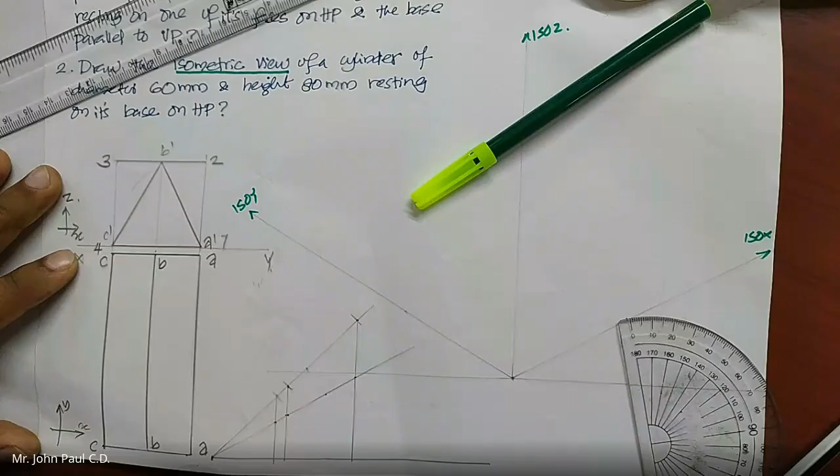ചെയ്യാമോ കുറച്ച്? കേട്ടില്ല. വീഡിയോ കുറച്ച് സൂം ഔട്ട് ചെയ്യോ? വൈ?

എന്തിനാ? ക്ലിയർ ആയിട്ട് വിസിബിൾ അല്ലേ എനിക്ക് നേരത്തെ, അതുകൊണ്ട്. സൂം ഇൻ ചെയ്യാനാണോ ഉദ്ദേശിച്ചത് അതോ സൂം ഔട്ട് ചെയ്യാൻ? സൂം ഔട്ട്. സൂം ഔട്ട് ചെയ്ത് കഴിഞ്ഞാൽ ഇത്രയോ? ഇങ്ങനെയോ?

Okay, is that clear now? I don't know.

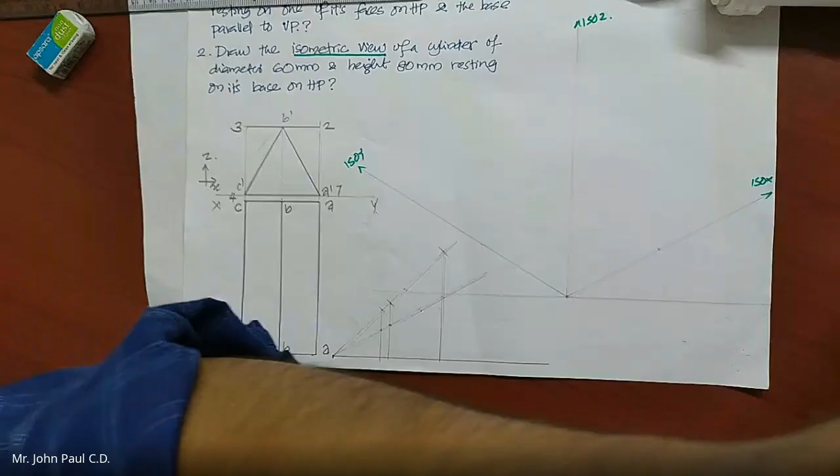Nikhil, isn't it visible? It is showing complete on the screen for me. Can you rotate your mobile if you are using it? Keep it in portrait mode. Sorry, landscape mode, so you can see that. Otherwise it will be very small, I think. You may not be able to identify the points. That's why I'm keeping it here.

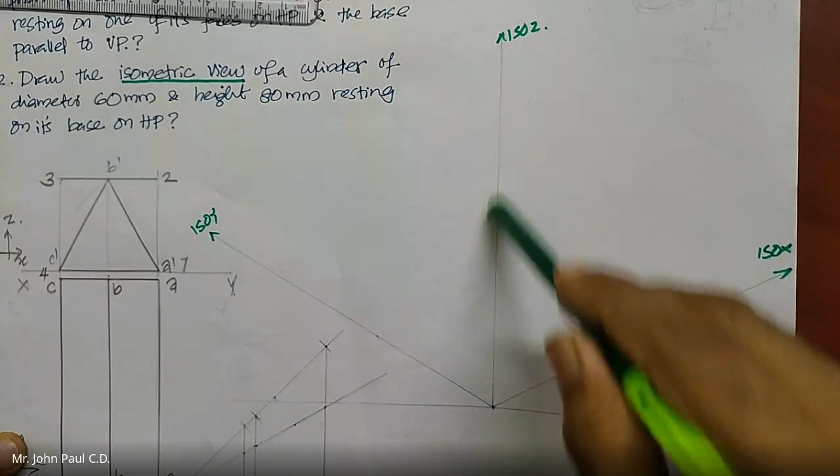Anyway, so the difference of this problem is you have the characteristic view only in this particular XZ plane. So you will have to draw that rectangle and the triangle inside in the iso X, iso Z plane. So here I have to draw the rectangle. That's the only difference. Okay, so I'll do that. I hope it is clear.

അതായത് നമ്മൾ നേരത്തെ വരച്ച പടങ്ങളിലൊക്കെ the characteristic view was below, it was in the XY plane. So I used iso X and iso Y plane to draw that rectangle or whatever pentagon or whatever shape we have in the characteristic view.

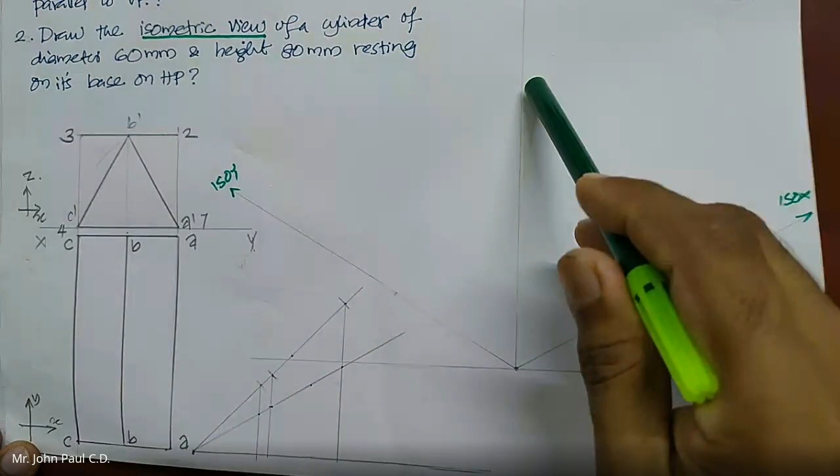But here it is in the XZ plane, since it is resting on one of its rectangular faces on HP. So it comes like this. So you see XZ plane. So you have to draw that rectangle in iso X, iso Z direction with the isometric dimension, because the question is given as isometric projection. So I'll do that.

So this was the length along the x-axis. Along x-axis, this was the dimension, which is 40 actually. So I took, I marked 40 here and I got iso 40 here. So I just marked it here so that I got this point as 1 and this point is 4. See, I'm looking from here. 4, 1, 2, 3. Okay, so 4, 1 I got here.

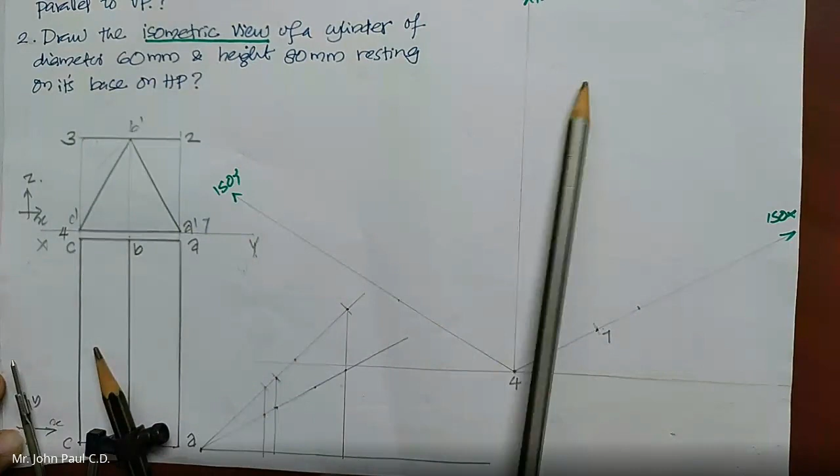To get 3, I have to get the iso dimension of this one. So I just marked it here. So I'll take it from this using a compass. So I mark it here along iso Z direction. So I got that point also.

Okay, now I'll complete this rhombus or parallelogram. Either you can do the same with the compass. അതായത് നമ്മൾ ഈ എടുത്തിരിക്കുന്ന ഇതേ ഡയമെൻഷൻ ആണ് ഇവിടെ നിന്ന് വരേണ്ടത്. So you can use the arc method. ഇങ്ങനെ വരച്ച് ഈ ഡയമെൻഷൻ അതായിരിക്കും കുറച്ചുകൂടി ആക്യുറേറ്റ് തോന്നുന്നു.

This you can mark here so that you will get the corresponding point over here. അതായത് ഈ ഡിസ്റ്റൻസും ഈ ഡിസ്റ്റൻസും സെയിം ആണ്. I don't know whether you can see. Now you can see, right? So 1 to 2 and 4 to 3, the height will be same. And 4 to 1 and 3 to 2 will be the same. So you can take those dimensions in a compass and cut an arc, you will get the corresponding point.

So I got 2 here, and this is the 3, which I had already marked. Now I'll join them to get the rectangle here.

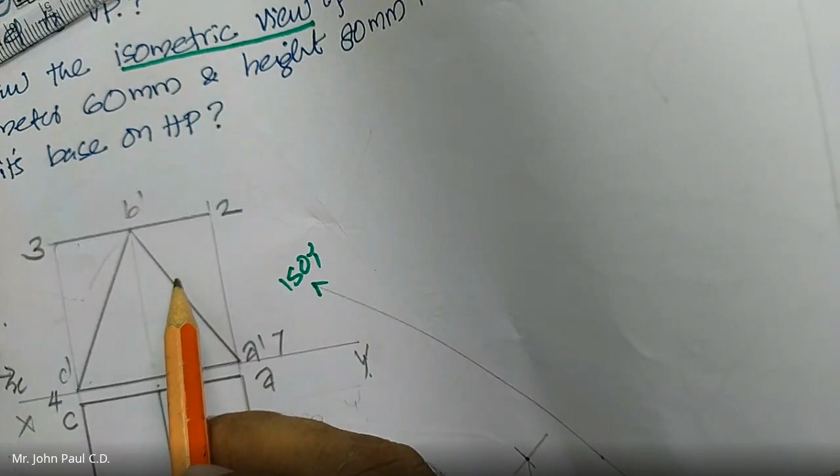Okay, so here what I can do is, this point is already A. This is already A. From this figure, I can say that it is A. And this is C. This is C. And you see that B is actually the midpoint of 2, 3, so here also it should be the midpoint.

Okay, either you can do it like that, ഇതിന്റെ midpoint കണ്ടുപിടിക്കാം, measure ചെയ്തിട്ട് അതിന്റെ midpoint mark ചെയ്യാം, or what you can do is, with respect to this rectangle, what will be the dimension I should move towards the right along the x direction? ആ dimension എടുക്കുക, അത് ഇവിടെ മാർക്ക് ചെയ്യുക, അതിന്റെ iso dimension കണ്ടുപിടിക്കുക, then I can mark it.

I have to measure this distance, because this much distance has changed. This much is changed exactly, and this much is the y ordinate, x ordinate, y ordinate. So you need to find out what is the x ordinate here.

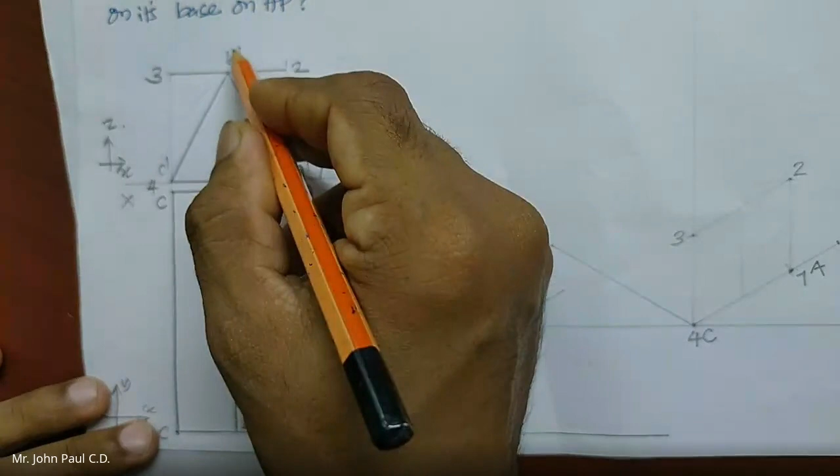You can measure it, or using a compass you can take that dimension, mark it here, get the iso dimension and mark it along here, and project along z direction, so that it will touch the 2, 3 point. So actually that will be the midpoint.

That means, measure how much you need to go from here, find its iso dimension, mark it here because it is isometric projection. Mark the iso dimension, then move along z direction, along iso z direction, so that you will reach up to the 2, 3 line. That point is capital D, so the midpoint you will get as capital D.

Now I got that face near me, which I can join. This will be the figure I am going to get, the triangle. Now I got one ABC, that means one base I have got.

I have another ABC on this side, so I have to mark it, isn't it? For that I will draw some thin lines from B as well as A, along iso y direction. In your case, maybe there will be a line already there, or you can draw a thin line in the graph. Now I need to find what is the dimension along y direction.

Can you tell me what will be the dimension along y direction, from one ABC to another ABC? Iso 70. I have given 70 or 80, 80 is what is given. 80. Iso 80, iso 80.

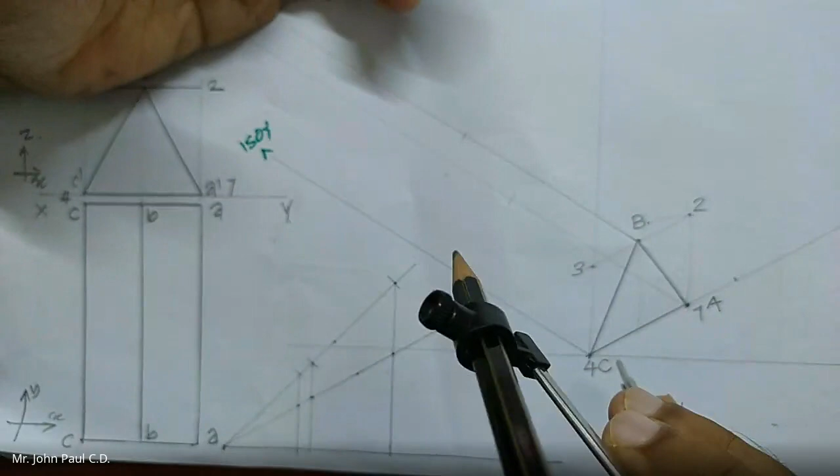So I'll get iso 80 from here, which I have already marked here. This is iso 80, and I'll mark it from A to A, B to B, and C to C, so that I'll get new points, which I have again named as A, B, C. So CC is iso 80, AA is iso 80, BB is iso 80. Now I can join the boundary, which will always be thick. So this is the boundary.

Now one more point is left. It's the same rule applicable as orthographic projection. A is within the boundary, which is supposed to be invisible, because I am looking from here. I am looking in these two directions. So this will usually be far away from where I am looking.

So this must be invisible, I assume it like that. All the lines towards A should be invisible. So it goes like this: invisible, and this line also should be invisible according to the law.

Anyway, my assumption was correct because I have to cross a visible edge, so that edge should be invisible. So if this is invisible and it is reaching up to an inner point, which is inside the boundary, all the edges towards that point will be invisible. So this is the final answer.

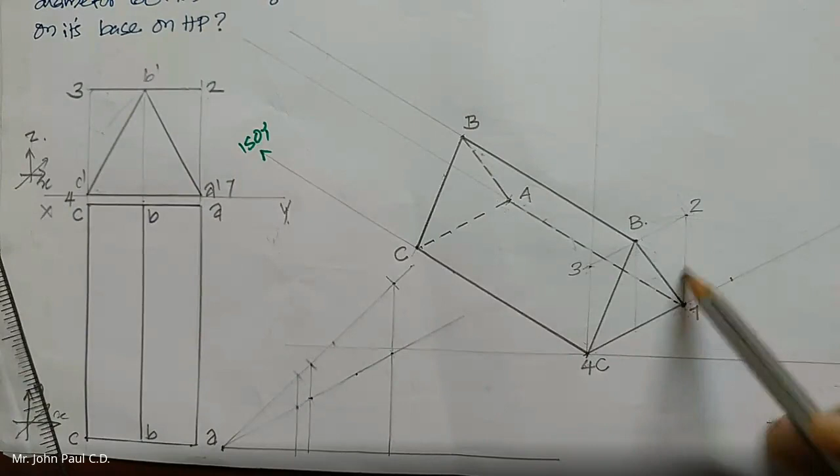So I did it like that. You can do along iso z, you can mark the dimension, this dimension itself, so that you will get point 2. Thank you, okay.

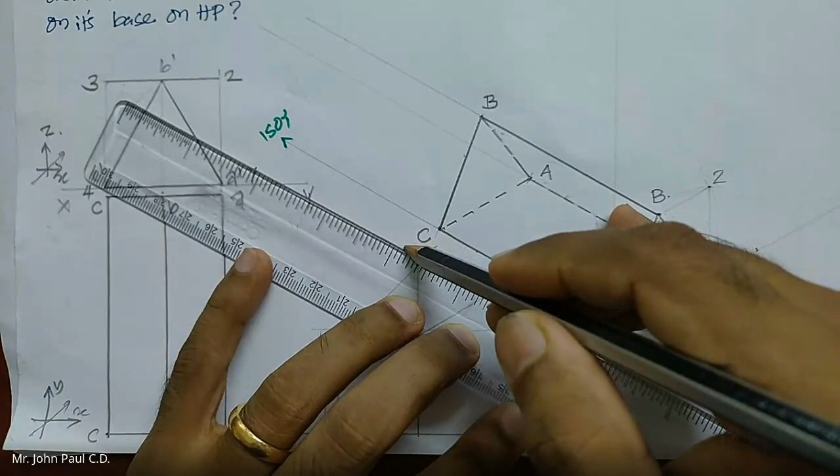So this I can mark it like this. ISO 80, and this one will be the dimension of the base, which will be equal to ISO 40.

So we'll move to the next question, which is the isometric view of a cylinder of diameter 60 mm and height 80 mm resting on its base on HP. Okay, so you have an isometric view in this case, so it will be much easier. You can draw the first view, right? The front view as well as top view. Where will be the circle, the characteristic view, which will be above xy line or below xy line.

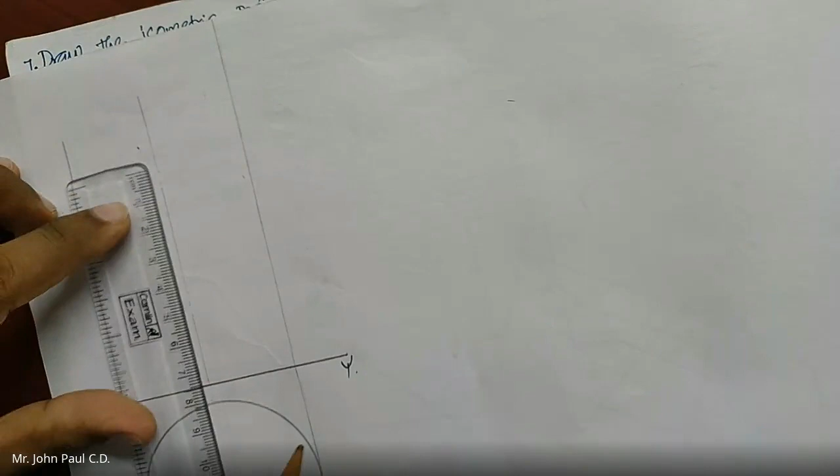It is resting on its base on HP. So base, which is the circle, which I will draw here in the top view. And I will draw the corresponding front view. And it has a height of 80 mm. So this is my front view as well as top view.

So it is not in the directions. Okay, it's having edges along x and y. So I have to construct a rectangle around this circle. So it won't be a rectangle, it will be exactly a square that you are going to get.

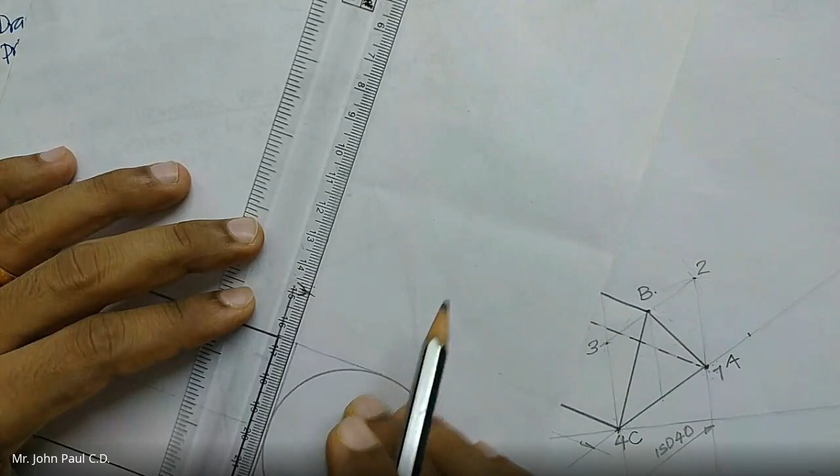In some cases, you even don't have to draw this diagram, front view as well as top view. Without that itself, you can draw certain isometric projections or views. Actually cylinder is such a case. Even without this drawing, you can directly draw the isometric projection or view.

It is quite easy. Of course, when it comes to sections, you will find it a bit tough. But in isometric projection, sections don't appear, only frustum appears. So if it is a cylinder, it's a very easy problem. Even without drawing these two, you can draw the isometric projection or view.

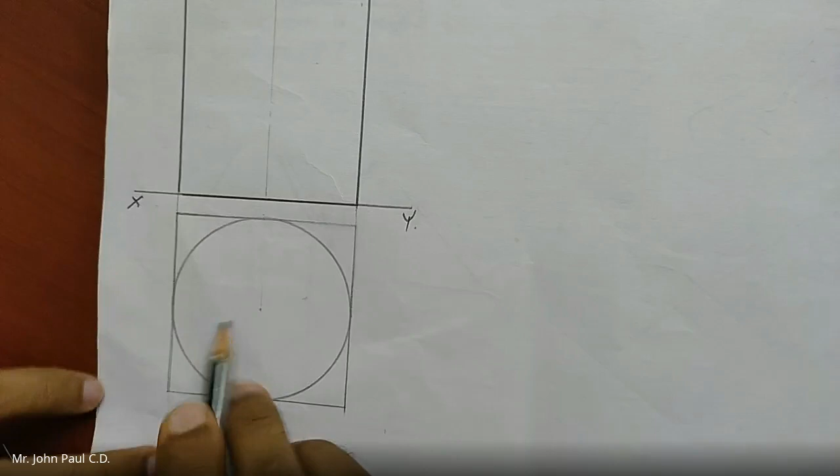Okay, I'll tell you how. So anyway, in this problem, you can draw the front view as well as top view. But for exams, you can even directly do that without this. So I am not giving any names because I don't have any corners. Only I have this rectangle, the square, which I have drawn around the circle to get the shape.

So this is say this is 1, this is 2, this is 3, and this is 4. And here comes my x direction, and this is my y direction. Here my x direction, this is my z direction. Because it is resting on its base on HP, so resting on xy plane.

I don't think you need much more time to draw this because it's quite easy one. You just draw the circle with the diameter 60, so that means the radius 30, height is 80, which is a rectangle. So here I have that, and in this case it is given as isometric view. So you need not to find what will be the dimension, iso dimension. You don't have to worry about that. So here is my reference line, and I come with this.

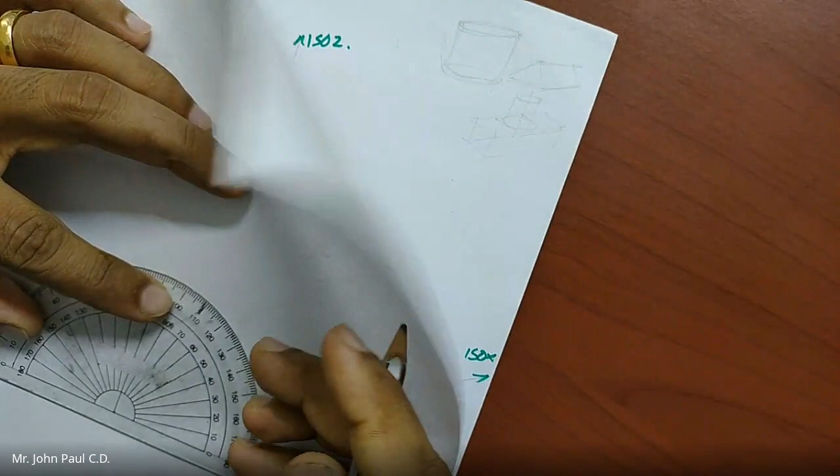So this is 90, and this is my 30 here and my 30 here on the left hand side. So it goes like this.

Okay, here it goes. So this must be my ISO X, as you know. This is my ISO Y, and this is my ISO Z. I have already marked all those dimensions. And since it is isometric view, as you know, I have to mark one. Okay, this is my position corner at which I am looking, so I can directly name it as 1.

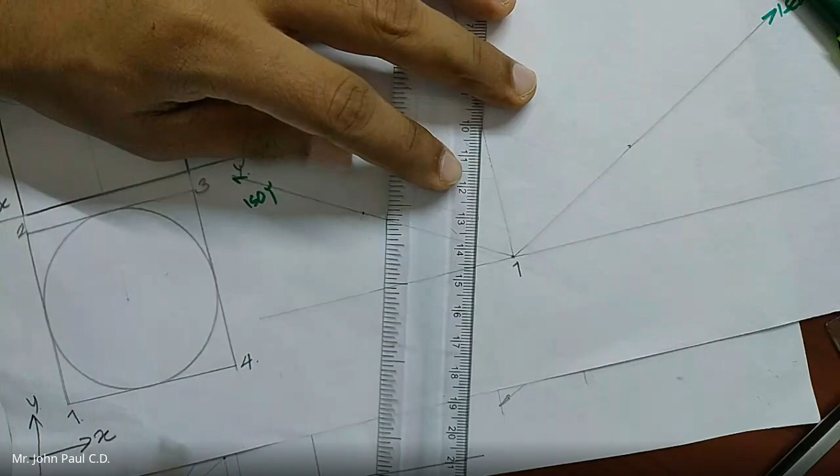No problem. And I know that 1 to 4 I have to mark. I will take the measurement from 1 to 4. It will be exactly the diameter of the cylinder. You know that, right?

So I have this diameter here, marked along ISO X. I'm not taking ISO dimension because this is an isometric view, so I can directly mark number 4 here. In the case of a cylinder, this will also be the diameter, so I can mark that here too. That's why it's quite easy to draw a cylinder in isometric view. In isometric projection, you have to find the dimension as ISO dimension, otherwise it's quite easy - much easier.

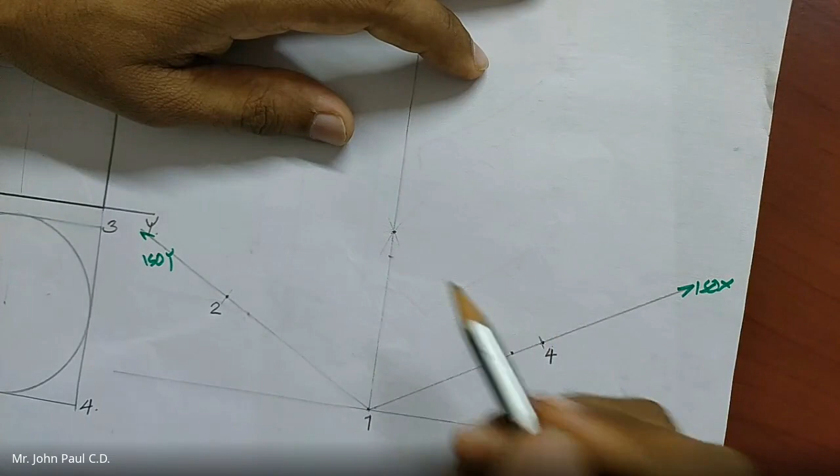From 4 to 1 and 2 to 1, the dimension will be the same. No wonder it will be exactly on this ISO Z line - instead of getting a parallelogram like before, here it will be a perfect rhombus shape. So this will be that point. Or you can take this dimension along the ISO X direction and get point 3, or take this dimension along ISO Y from 4 and get the same point 3. Either way, you can find it.

So this is my point 3. By constructing this, I'll get the rhombus, which represents the square I drew here to enclose that circle.

Let me ask one thing - if I have a circular shape and keep it in an isometric position, what will be the shape of the base? Ellipse. Yes, the concept is like you have a cylinder - it's applicable for all solids. It's like you are enclosing and keeping that particular cylinder in this case.

In order to get the isometric view of the cylinder, I'll keep the cylinder inside a box - a perfect box, not like this, there won't be any gap. A perfect box, and I will keep the box in an isometric position like this. So automatically, I'll get the isometric position of this solid. It is applicable for all prisms and pyramids. So this is what is happening. Are you getting it?

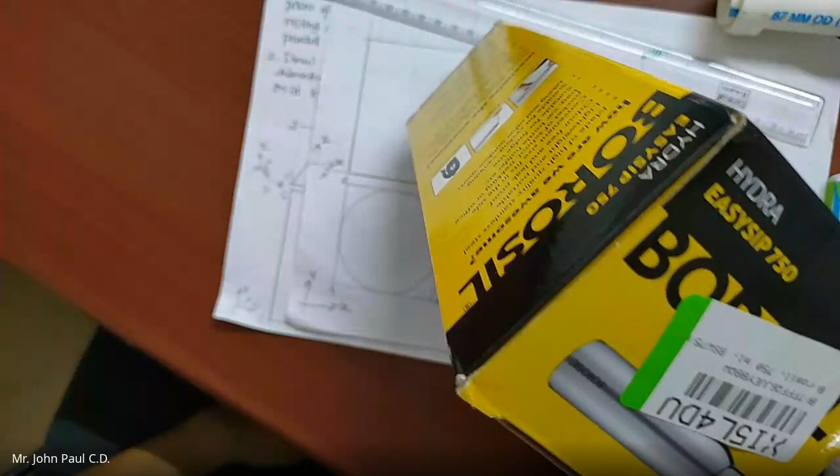You know how to draw the isometric projection of a square prism, right? It will be inclined like this - it's visible from its view. It will be inclined like this, right? Yes sir. So I'm keeping that box there with this particular object or cylinder in that position.

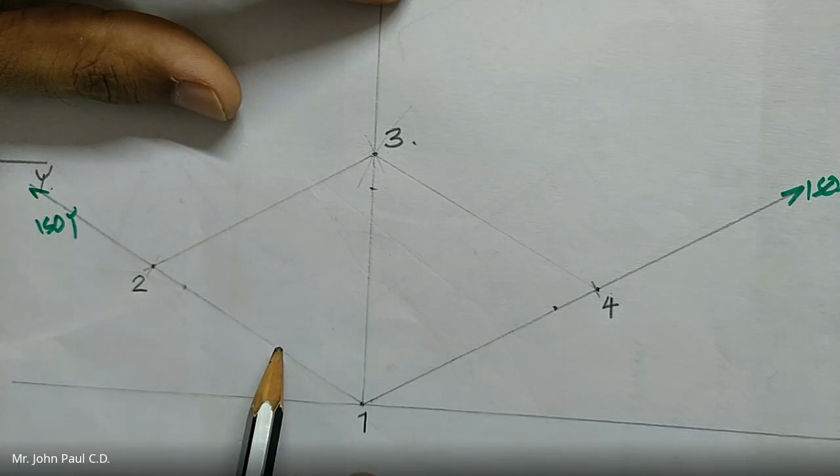We need four centers. So if you are drawing this, please keep your pencil and scale aside and listen carefully, because you need this - it's quite important. So I need four centers.

Here I have 2 points with obtuse angles - can you tell me which points have obtuse angles? 1 and 3. Yes, 1 and 3 - one will be one center and 3 will be another center. Out of the four center method, I got two centers. Now I need to find two more, not 2 or 4 - another two centers.

For that, I need to draw lines - from 1, I have to draw a line to the midpoint of the opposite sides, 2 to 3 and 3 to 4. Anyway, it is an isometric view, so it is very easy to find the midpoint because it will have a dimension of 60.

At 30, you can mark the midpoint. See, we got 30, the midpoint I got, and I'll mark the midpoint for all the lines - I'll tell you why. So this is also 60, I'll mark the 30 here.

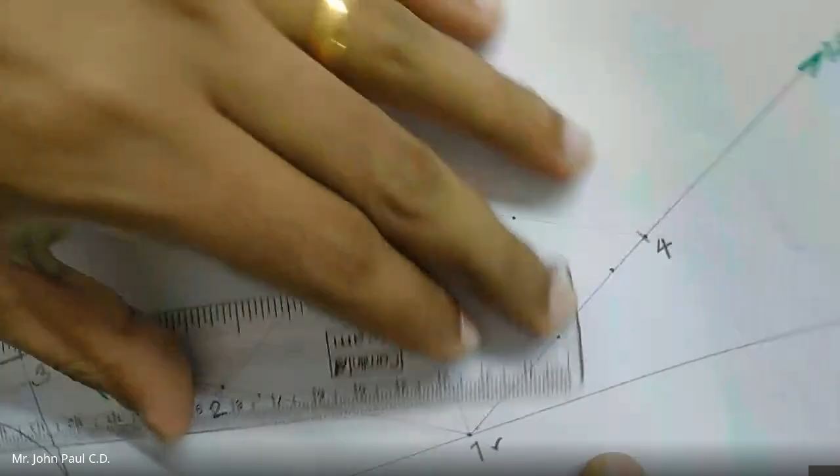Okay, this is 30, and here I have 60 again. So there will be 30. Or you can take a compass and mark along all these sides. That is also good. So I marked the midpoints.

Now I'll draw the lines from these centers to the opposite midpoints. Say 1, say 2, say 3, and say I have the fourth one. So this is the construction. I have two centers, and I drew lines to the opposite midpoints so that I have some lines like this.

I'll get a new point here on intersecting these lines. These are the next two centers. Now, how am I going to draw the ellipse? Please watch carefully because usually you will make mistakes here.

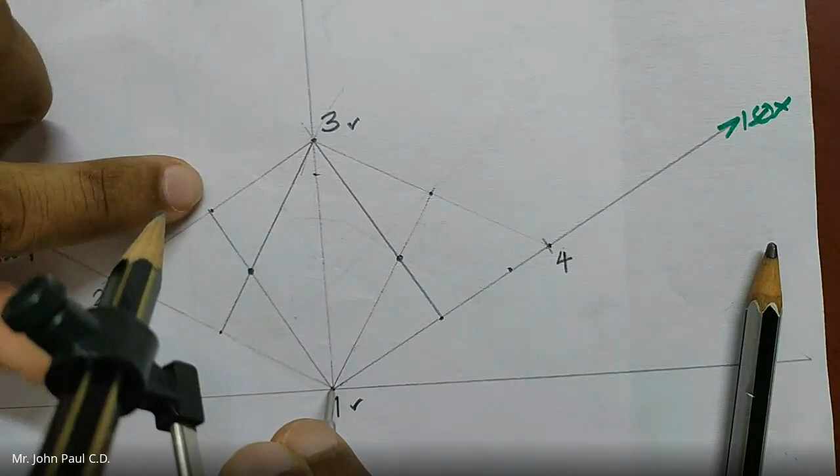So I take this one as the center, and the line to the midpoint as the radius. I will draw a curve like this. See, I got the top portion of the ellipse. Anyway, I have to draw this thin.

Anyway, you can draw that with a thin line so that you can make it. So I got this portion, and I can draw here also, taking this as the center and this as the radius. We'll complete it.

So I got the ellipse here. Of course, it won't be the perfect one, but this is the four center method to construct an ellipse.

Now you see, you got the square which came like a rhombus here, and the circle now looks like an ellipse. Now you need to draw another ellipse at a certain height. That is, we have drawn only the bottom base. I have to draw the top base, right?

Right? Yes, Yes, sir. sir.

Yes. So I'm going to completely construct that box which I mentioned earlier. So what will be the height of the box? 80 millimeters. So I'll mark 80 millimeters along the ISO Z direction.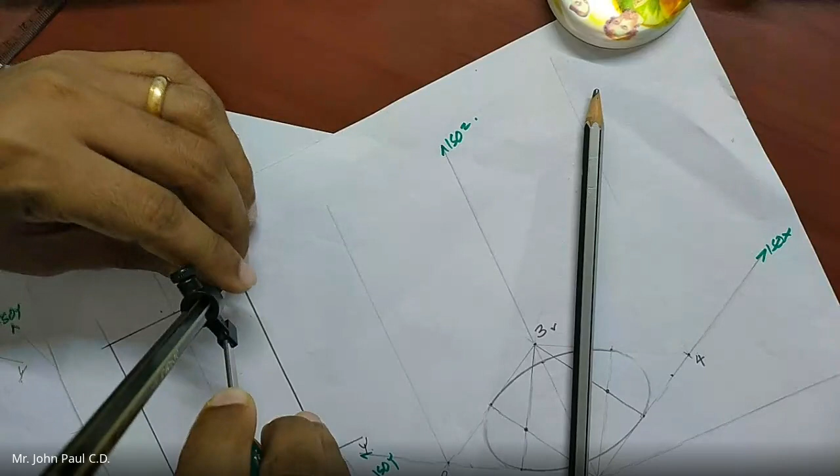See, you need not take this in scale. You can directly take that from here, from the front view, if you have drawn it. Otherwise you can use the compass directly with the scale to take it.

But in this case, you have to draw the front view and top view. You need not draw this for the exam necessarily. For a cylinder, if it is isometric view, it's very easy - you can directly draw them.

So 80 millimeters above, I will get the same shape ellipse there. For that, I'll construct the box, the isometric projection of the box. So this will be 2, this will be 4, this will be 3, and this will be 1.

So I got 1, 3, 2, and 4. So I can construct the rhombus again. It's quite easy, just join them, and do the same procedure as what I did below.

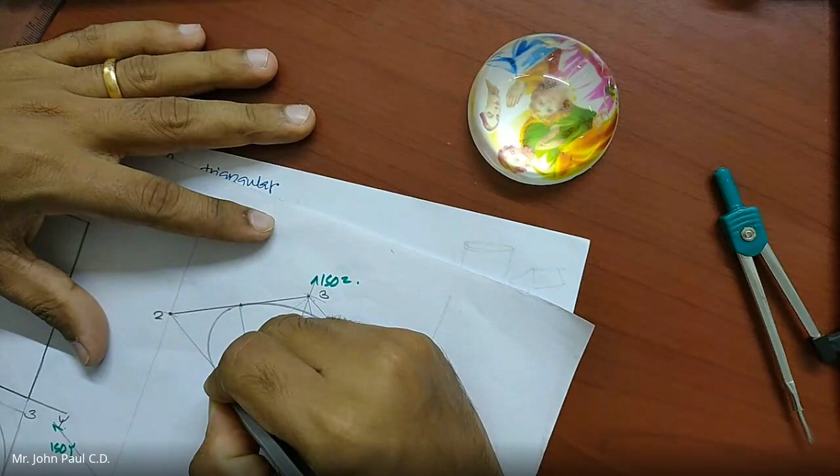So the top face will be always visible. And bottom, some portions will be invisible. So how do I find it out? I have to draw a tangent from the first ellipse to the second ellipse. Here also, it goes like this. The bottom portion will be visible, which is this portion, because it is the boundary. And this portion, as I said before, will be invisible, so I have to go with broken lines.

So this is your final answer. You can try it now. And if you have any doubts in between, please ask.

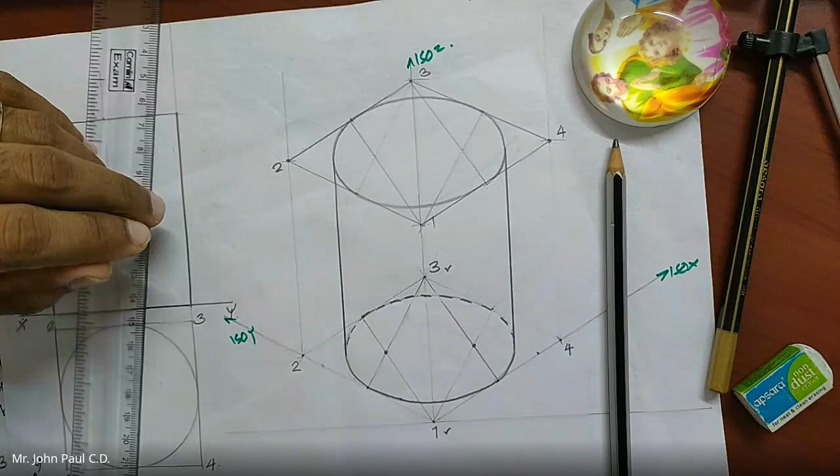Wow, you have completed. Okay, you constructed the entire cylinder. You completed the end, yes. Oh, that's fast. Thank you. Now we have to see.

Okay, we have seen the projection of solids which are standing and which are lying also. We have seen pyramids and prisms. So I'll give you a combination. A lying solid and a standing solid. And if it was a cone, how will you draw?

If it was a cone, you have to construct the ellipse here, of course, and you have to find the center, right? The axis bottom point needed to be found out. So since this is a cylinder and symmetric, you can take the diagonal so that you will get the center.

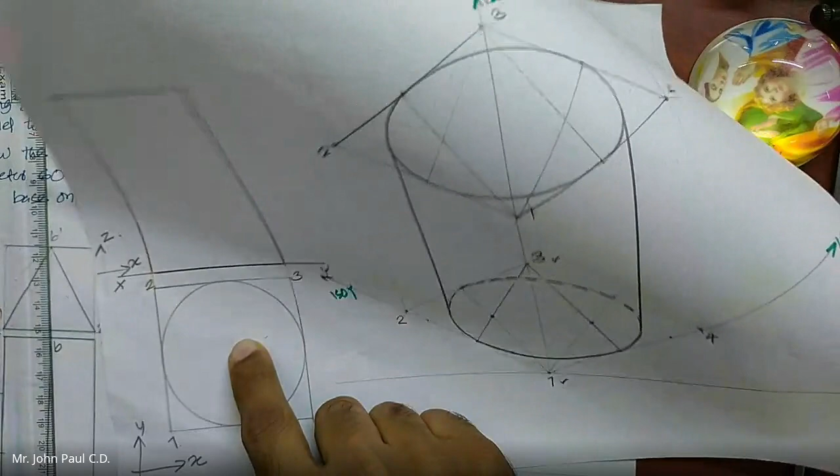Easily, once you take the diagonal you get the center. Or you can mark the center by taking the x direction and y direction, as we have discussed in the case of a pentagonal pyramid. Once you get it, you can mark the center along the isometric direction. You can draw a tangent to this ellipse. You will get the isometric view of a cone, right? Isn't it? Yes sir, yes.

Now I'll give you a combination. One solid is standing over another solid. Draw the isometric view. Draw the isometric view of a combination of a square prism and a square pyramid. Square prism and a square pyramid.

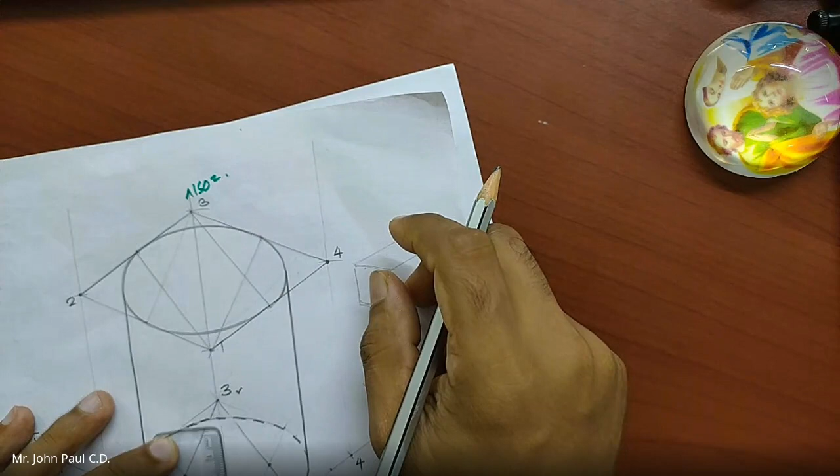The square prism has a base edge of, say, 40 mm. Square prism of base edge 40 mm and length 80 mm.

Which is resting on one of its rectangular faces, with axis perpendicular to VP. The square prism of base edge 40 and 80, resting on a rectangular face and with the axis perpendicular to VP.

The square pyramid of base edge 30. Square pyramid of base edge 30, okay, 30.

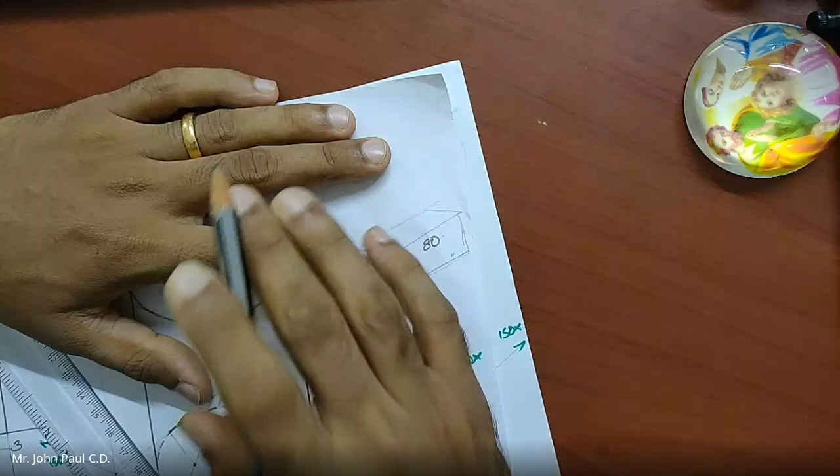Is resting above the square prism, with all the base edges equally inclined to VP. All the base edges equally inclined to VP. There's a small twist included in that, you know.

Equally inclined to VP, and the axis of the square pyramid bisects the axis of the square prism.

Okay, I'll tell you once more whether I have conveyed something wrong, please let me know. We have a combination of solids - a square prism as well as a square pyramid. The square prism is resting on one of its rectangular faces on HP with its axis perpendicular to VP. A square pyramid is placed over that prism such that all the base edges are equally inclined to VP. The base edge is 30, as I said. Did I say the height? Height is 60.

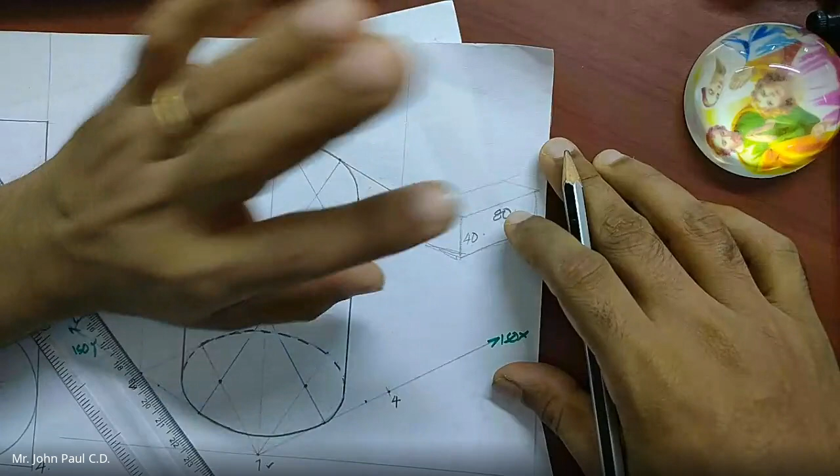Okay, pyramid height is 60. And it is resting above the square prism such that the axis of the square pyramid bisects the axis of the square prism, and also the base edges of the square pyramid are equally inclined to VP. Is that what I said? Yes sir, yes sir, thank you.

So how can I do that? So can you draw the front view as well as the top view?

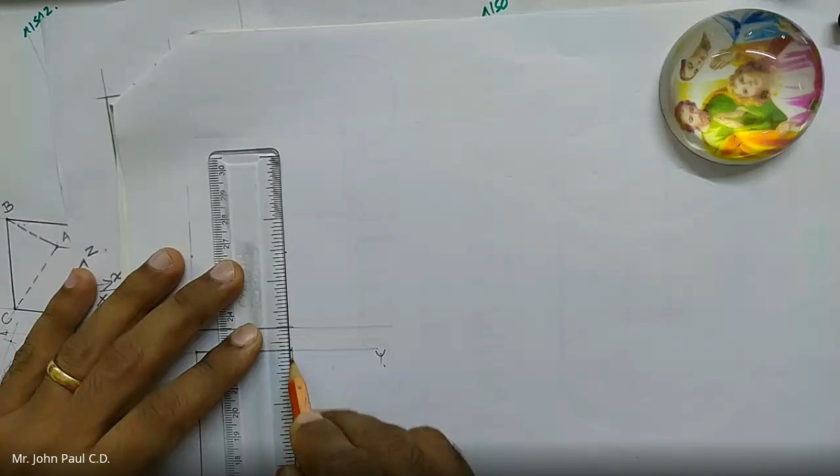I just managed to do the top view. Okay, if you want, you can correct that into height of the square pyramid as 50. That will do, if you have difficulty in drawing this.

And the question was isometric view, right? Yes, sir, yes. Okay, so first I have constructed the front view as well as top view.

When you draw, you can draw it like this. You can keep it in the portrait position so that you get more space. Since I had to draw it here, I adjusted and drew it this way, like this. So I constructed the front view and top view of the square prism, which is resting on its base on HP.

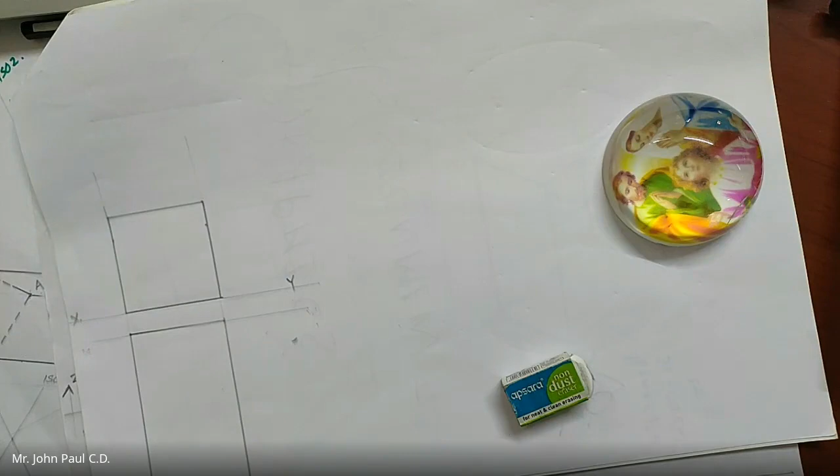Okay, this is my XY. Now I have to construct the square prism - sorry, pyramid.

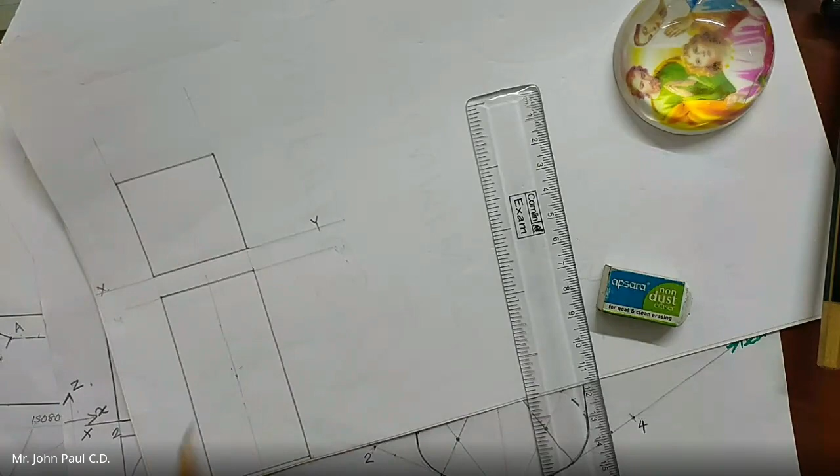So this was the axis, if I consider. So the midpoint will be at a distance of 40 mm. So this is the bottom point of the axis of the square pyramid. The bottom point of the square pyramid's axis must be here.

Now I have to draw the square pyramid here. So the base will be a square, of course. But there's a small problem - it is not in edge position, it is in corner position. Why? Because all the edges of the square pyramid are making equal inclination with the VP. So it should be in the corner position.

So how can I do that? Sir, can you repeat? Which one? What you just asked. The corner position, I don't understand what you said.

Okay, in the question it's given that the base edges of the square pyramid are equally inclined to VP. So in the top view, the base edges should be equally inclined to the XY line. Equally inclined means all the edges are at 45 degree inclination. That means the corner position. Is that okay? Okay.

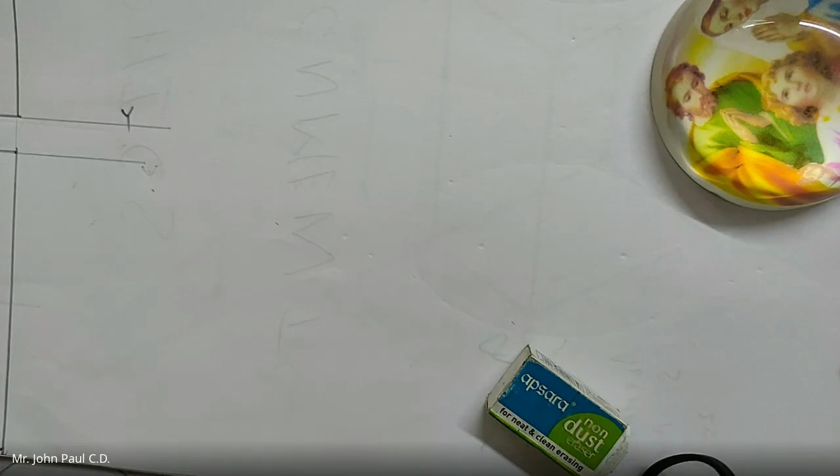So anyway, the base edges should be at a 45 degree inclination, right? 45 here and 45 here I marked. And through this center I'm going to draw a line - it's a construction line, it should be thin. Okay, and this will be the 45 degree line. Right.

Okay, I don't know whether you can see it or not. Okay. So this is the bottom point of the square pyramid. We need to draw a square here.

It's in corner position, and this should be the center also. Okay, but I can't draw it just anywhere. So I took this as the center, and through that center I marked the 45 degree dimension.

Okay, and what is the dimension of the square pyramid? What was the base edge dimension? 30 mm. 30. Okay, so I'll mark 30 here - that is 15 to the left, 15 to the right.

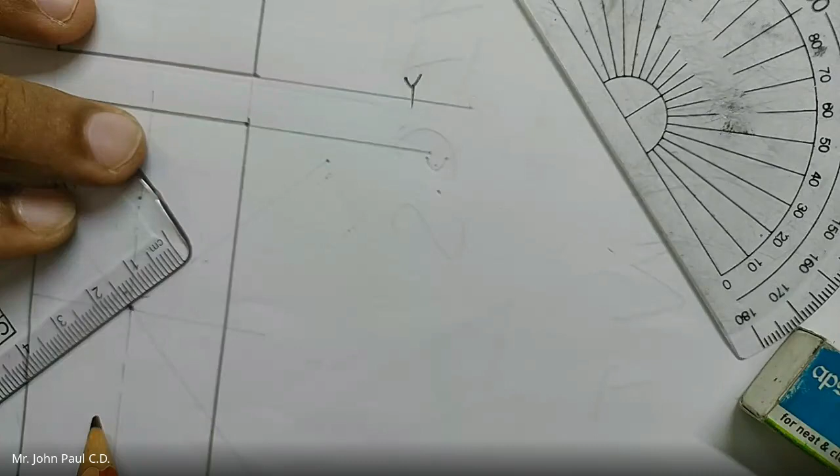You can also do that with a compass, because your compass has a pencil with 0.5 mm thickness, so it's easy for you to do that. This one is blunt, so it's a bit difficult. Anyway, so I marked it like this, right?

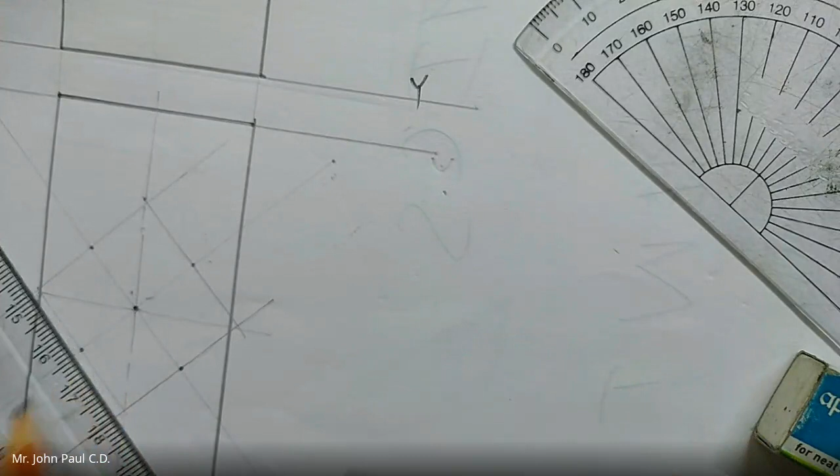Okay, exactly I didn't stop at this, it went a bit outside. So I hope you also will have the same. It may not stand exactly at 40, it will have gone a little outside. This is how you are going to do it.

I hope it's clear. I drew 45 degrees here and 45 degrees here, because the base edges' inclination is 45 degrees. So from here I mark 15 to the left, 15 to the right, so together it makes 30. Similarly, 15 here, 15 here, so together it makes 30. So I'll just draw that - it's standing a little outward. I hope you also will get something like that.

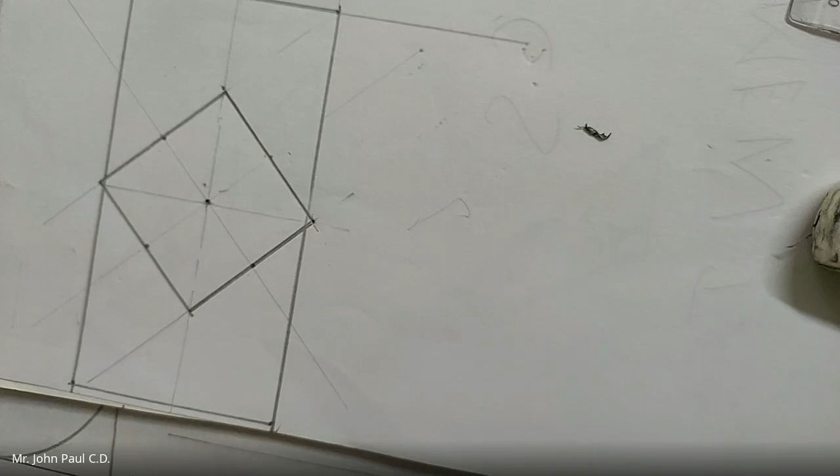But if drawn correctly, these two points should come on this same axis, right? Yes sir, yes. So this is the top view of the square pyramid with its axis, and after extending it will intersect or bisect the axis of the square prism which is lying.

Now since it is actually a pyramid, the slant edges should be visible. Slant edges should be visible. So this is how it's going to look like.

Now I will project it up. Project it up. So this is the boundary that I should have here on the right hand side.

In my case it is standing outward, so I just have to go like that. And this is the base of the pyramid. The base extends up to here.

And the height is given as 60. Whether I can mark 60? Yes, I can, okay.

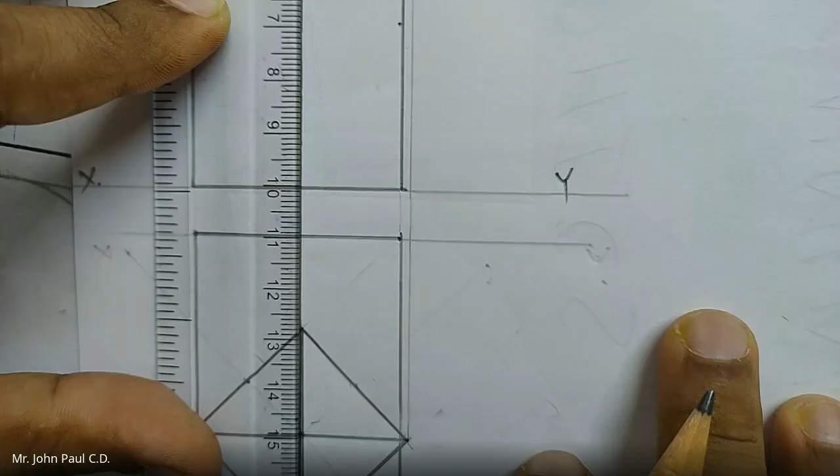So I'll mark the height here. You told to change it to 50? You told to make it 50. You can take it 50, it's okay. If you have corrected it in the question, you can make it 50, no problem. I thought there won't be enough space to draw since it is too high. I have 60 here for the time being, so I take 60. If you have taken 50, you can take 50. If you have corrected that in the question, you can take 50.

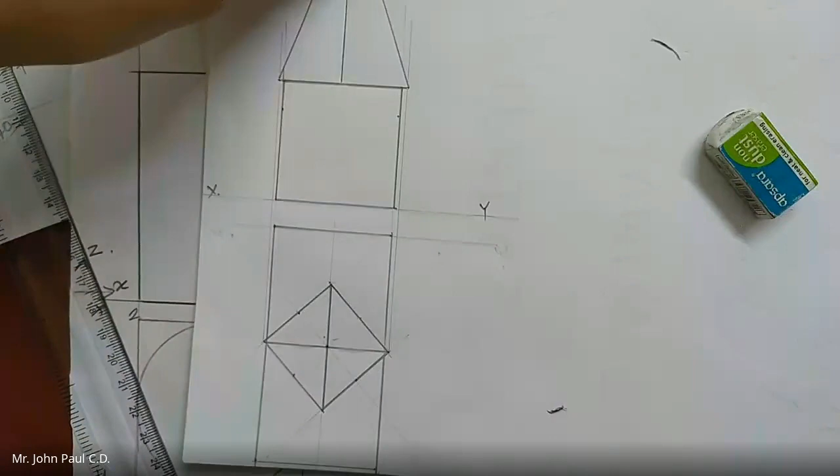I'll name it. I'm going to name the square prism as ABCD. So this is A, B, C, and actually A dash, B dash, C dash, and D dash. So this is small a, b, this is c, d here, and here it is a, b, and this is c, d. Both bases I am giving the same name, ABCD, ABCD.

For the pyramid, I'll give PQRS. So this is P, this is Q, this is R, this is S, and this is O of course. So the corresponding front view, I'll get this point as P dash, and here I have Q dash and S dash, see this line, and here I have R dash.

See, C dash is this point, and R dash is this point which is projecting out. B dash is this point, and P dash is this point which is projecting out. You can see that from the front view and top view. This will be my O dash. So I figure it's like something very big.

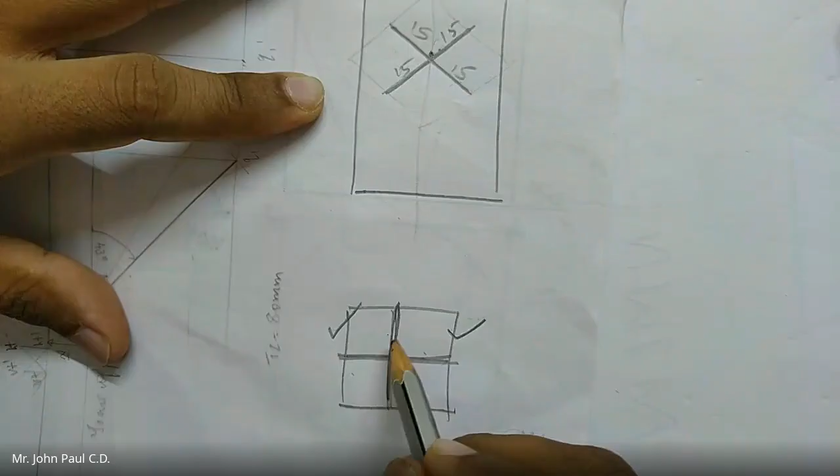ഇതേ ഡയമെൻഷൻ ഇപ്പുറത്ത് വരച്ചു. സിമിലർലി ഇതിന് പാരലൽ ആണ് ഇത്, അതേ ഡയമെൻഷൻ ആണ്. സോ ഐ ഡ്രോ ഇറ്റ് ഹിയർ ആൻഡ് ഹിയർ, ഐ കൺസ്ട്രക്റ്റഡ് ദാറ്റ് ഹിയർ. ഇതാണ് എന്റെ ബേസിക് കൺസെപ്റ്റ്. ഞാൻ 4 ആയിട്ട് ഡിവൈഡ് ചെയ്തു, അതിന്റെ സെന്റർ ലൈൻ ആണ് ആദ്യം വരയ്ക്കുന്നത് എളുപ്പത്തിൽ, എന്നിട്ട് ബാക്കി ജോയിൻ ചെയ്യുന്നു. ഐ ഹോപ്പ് ഇറ്റ് ഈസ് ക്ലിയർ. യെസ് സർ, ക്ലിയർ, താങ്ക് യു.

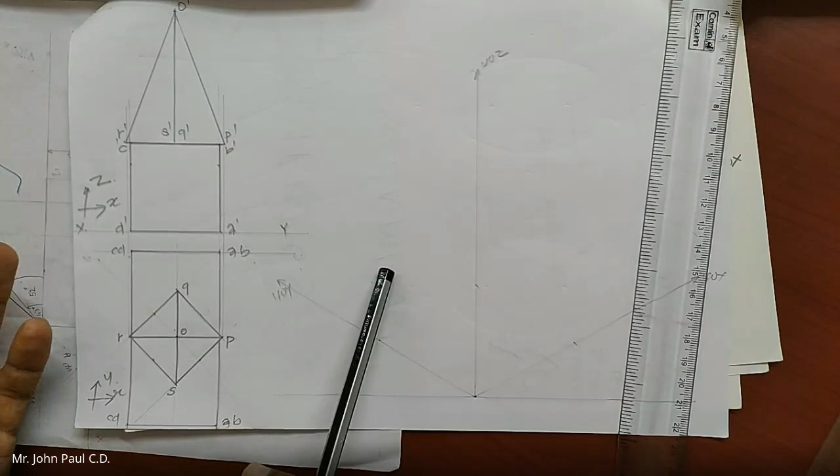Have you constructed this one, the front view as well as top view? Yes sir. So the first one is actually, you have to draw the isometric view of a square prism, which is quite easy. Since the question says that it is an isometric view, say this will be the dimension.

XZ ലാണ് ക്യാരക്ടറിസ്റ്റിക് വ്യൂ വരുന്നത് പ്രിസത്തിന്റെ. സോ XZ, ഐസോ X ഐസോ Z ൽ ഞാൻ അതിന്റെ ബേസ് വരയ്ക്കാൻ പോകും. ഒരേ ഡയമെൻഷൻ ആണ്, സ്ക്വയർ ആണ്, quite easy to find all the points.

സേ ഇതായിരുന്നു A, B എന്നാണ് നോക്കുന്നത്. സോ ദിസ് ഇസ് B, A, this is B, and this is C. So it's quite easy to construct.

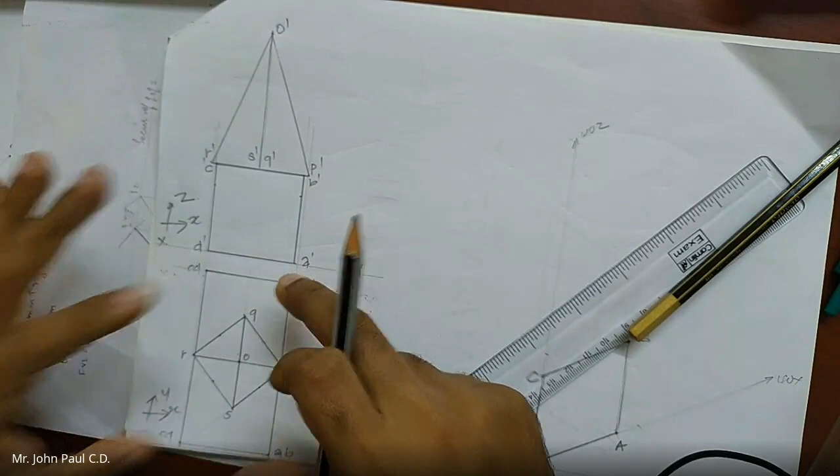So first base is over. ഇനി അറിയേണ്ടത് the length along iso y. Okay, because along y direction ആണ് ഇതിന്റെ ലെങ്ത് പോയിരിക്കുന്നത്. I'm talking about the prism which is lying on horizontal plane. So along y it has the length which is equal to 80 mm, so I have to mark that along iso y direction. So from all these points, parallel to iso y, I'll draw lines.

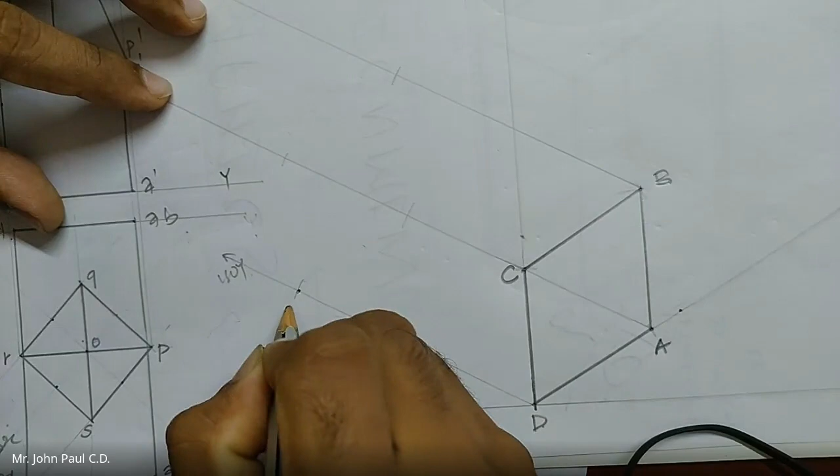ഇതെനിക്കൊരു ലൈനായിട്ടാണ് വരുന്നത്, നിങ്ങൾക്ക് അങ്ങനെ ആയിരിക്കും. It will look like a single line. And now I will mark the dimension which is 80 mm, which I can directly take using a compass from the top view, which is 80 mm, and mark from A to the next A, next A, next B, next C, and next D. So this is D, this is C, this is B, and this is A.

I'm not sure whether it is visible. Actually, it is invisible. Okay, anyway, നമുക്കത് പിന്നീട് join ചെയ്യാം. First, I will join the boundary.

And this is the boundary that I get. And you can see that the point C is within the boundary. C നമുക്ക് കാണാൻ പറ്റും, ഇവിടെ നോക്കുന്നുണ്ട്, ഫ്രണ്ട് ഫേസ് കാണാൻ പറ്റും. And also we know that the top base, അല്ലെങ്കിൽ ടോപ്പ് ഫേസ് കാണാൻ പറ്റണം, ഒരു ഐസോമെട്രിക് പ്രൊജക്ഷനിൽ. സോ ടോപ്പിൽ വരുന്നത് ഈ പറയുന്ന BBCC ആണ്. സോ ദാറ്റ് ഷുഡ് ബി വിസിബിൾ.

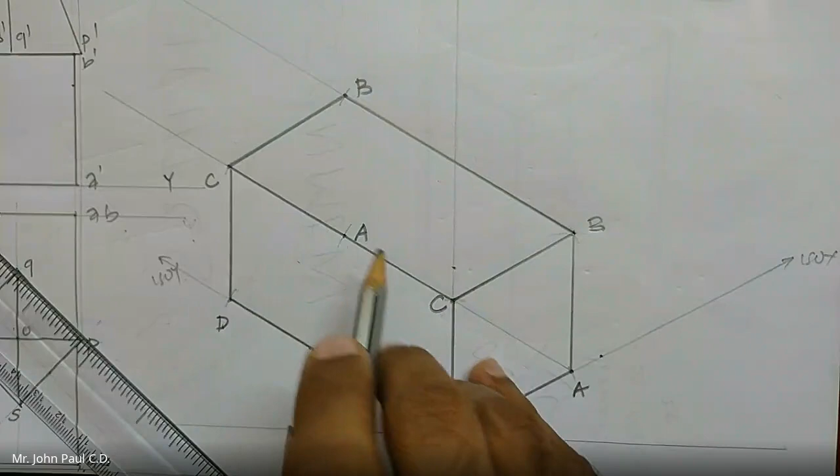So I have already constructed this, സ്ക്വയർ പ്രിസം വരച്ചു കഴിഞ്ഞു. ഇനി എനിക്ക് വരയ്ക്കാനുള്ളത് പിരമിഡ് മാത്രമാണ്. പ്രിസം ഇറ്റ്സ് നോട്ട് ഡിഫിക്കൽട്ട്. ഇതിന്റെ മുകളിൽ പിരമിഡ് വരയ്ക്കുമ്പോൾ എല്ലാ പ്രോബ്ലം ഇത്ര ടഫാണെന്ന് വിചാരിക്കരുത്. പിരമിഡ് ഞാൻ ഇങ്ങനെ ചെരിച്ചു വെച്ചിരിക്കുന്നതുകൊണ്ടാണ്. ഇഫ് ഇറ്റ് വാസ് ബേസ് എഡ്ജ് പാരലൽ ടു VP, it would have been much easier. നിങ്ങൾ ഇങ്ങനെ ഒരു പ്രോബ്ലം ചെയ്തിട്ടില്ലാത്തത് കൊണ്ടാണ് ഞാൻ ഇത് ചെയ്യിച്ചത്. ഇനി ഇതാണ് വരയ്ക്കാൻ പോകുന്നത്.

ഓക്കെ, ഇത് വരച്ചു കഴിഞ്ഞോ? Yes. So now the important thing, I have to draw this one. ഇത് എങ്ങനെ ഇങ്ങോട്ട് വരയ്ക്കും? ഇത് നമ്മൾ പെന്റഗൺ പിരമിഡ് വരച്ചതുപോലെ, അല്ലെങ്കിൽ പെന്റഗൺ പ്രിസം വരച്ചതുപോലെ. Now if I consider this, none of the base edges are parallel to x axis or y axis. ശരിയല്ലേ?

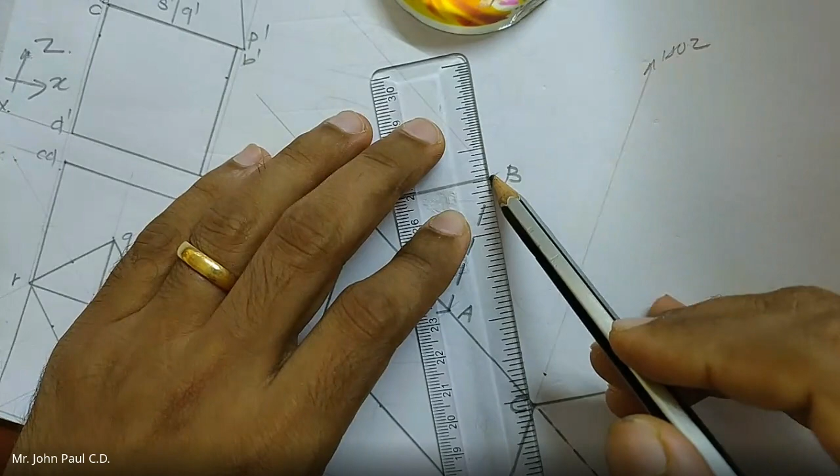ഇത് റെക്ടാംഗിൾ ആയതുകൊണ്ട് ഈസിയസ്റ്റ് മെത്തേഡ് എന്ന് പറയുന്നത്, ഇഫ് യു ഡ്രോ ദ ഡയഗണൽസ്, ദാറ്റ് വിൽ ഗിവ് യു ദ സെന്റർ, isn't it? രണ്ട് രീതിയിൽ വരച്ചത് ഒരേ പോയിന്റിൽ വന്ന് നിന്നു. Either you can try x y y x like that, or just draw the diagonal, you will get the center. So this is the center at which I have to place the pyramid such that the bottom of the axis is coinciding with this point.

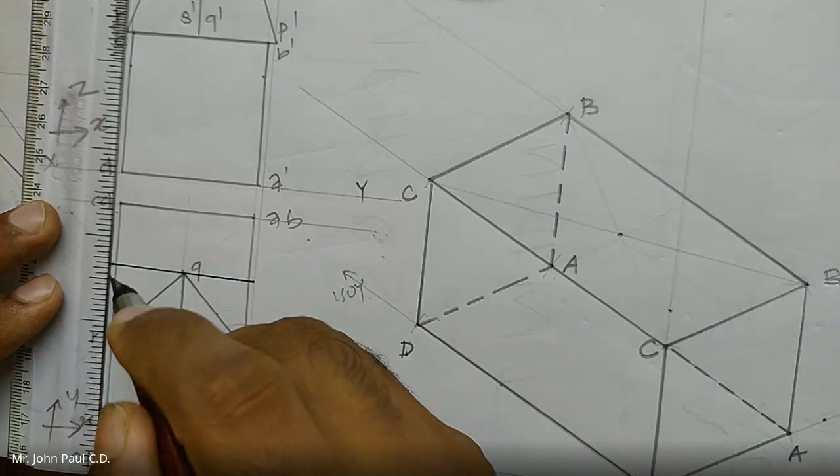ഇത് എങ്ങനെ അങ്ങോട്ട് വരയ്ക്കാം? So you have to construct a rectangle around it. അത് ആക്ച്വലി റെക്ടാംഗിൾ ആയിരിക്കില്ല, അതൊരു സ്ക്വയർ ആയിരിക്കും. ഞാനത് വേറെ കളറിൽ വരയ്ക്കുന്നുണ്ട് നിങ്ങൾക്ക് മനസ്സിലാകാൻ വേണ്ടിയിട്ടാണ്. Anyway, you just need to draw that as a construction line which is very thin. This is the rectangle, sorry, the square in this case, I am going to construct here. And I'll name it 1, 2, 3, 4.

ഇനി ഇത് എങ്ങനെ അപ്പുറത്ത് മാർക്ക് ചെയ്യാം? സ്ക്വയർ ആണ്, ഇവിടെ വരുമ്പോൾ അത് റോംബസ് ആയിട്ട് മാറും. ശരിയല്ലേ? Yes, sir.

ഇനി ഇതും കൂടെ ഒന്ന് ശ്രദ്ധിച്ച് കേട്ടേക്കാം, അത് കഴിഞ്ഞ് നിങ്ങൾക്ക് തന്നെ വരയ്ക്കാം. എനിക്കിവിടെ C D A B എന്ന് പറഞ്ഞിട്ട് ഞാനിവിടെ വരച്ചിരിക്കുന്ന ഒരു ലൈൻ ഉണ്ട്. ഇവിടെ C B എന്ന് പറയുന്ന ഒരു എഡ്ജ് ഉണ്ട് എന്ന് കരുതുക. ഈ C Bയിൽ നിന്ന് ഇത്ര ഡിസ്റ്റൻസ് മാറിയാണ് എൻ്റെ 2-1. ശരിയല്ലേ?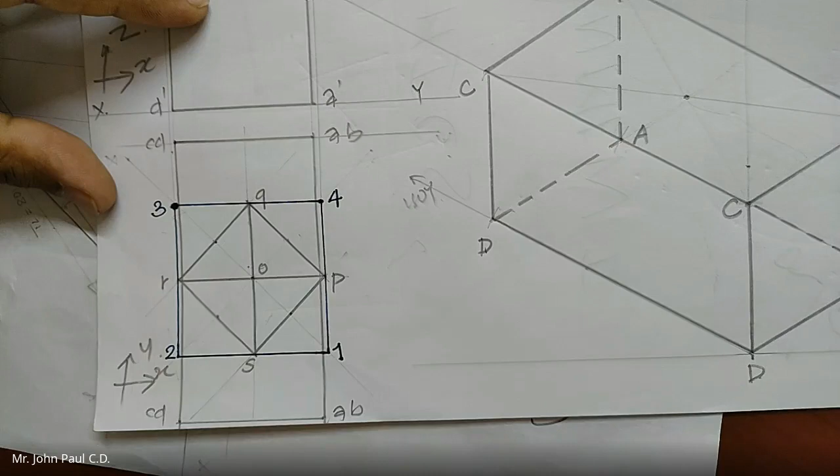Yes, sir. Which you can directly measure from the compass. See, like this. ഇത്രയും ഡിസ്റ്റൻസ് മാറിയാണ് 2-1 എന്ന് പറഞ്ഞ ലൈൻ വന്നിരിക്കുന്നത്. ശരിയല്ലേ? And it is parallel to this CB. ഒരേ ലെങ്ത് അല്ല, ബട്ട് പാരലൽ.

റെഡി അല്ലേ? C B ഈ എഡ്ജിന് പാരലൽ ആണ് 2-1. ശരിയല്ലേ? Yes, sir. So I'll draw a parallel line. I'm taking the dimension from 2 and 1. ചെരിച്ചല്ല എടുക്കുന്നത്. ഈ ലൈൻ along this line, the shortest distance എടുത്തിട്ട് I'll mark it here so that I can draw a construction line through that which is parallel to CB.

ശരിയല്ലേ? കാണാനില്ല അല്ലേ? സോറി. ഇപ്പൊ കാണാവോ? ഞാനൊരു കൺസ്ട്രക്ഷൻ ലൈൻ വരച്ചിട്ടുണ്ട്. കുറച്ചുകൂടി ഡാർക്ക് ആയിട്ട് വരയ്ക്കും. ക്ലിയർ? Yes, sir. യെസ്. ഇനി എന്ത് ചെയ്യാം?

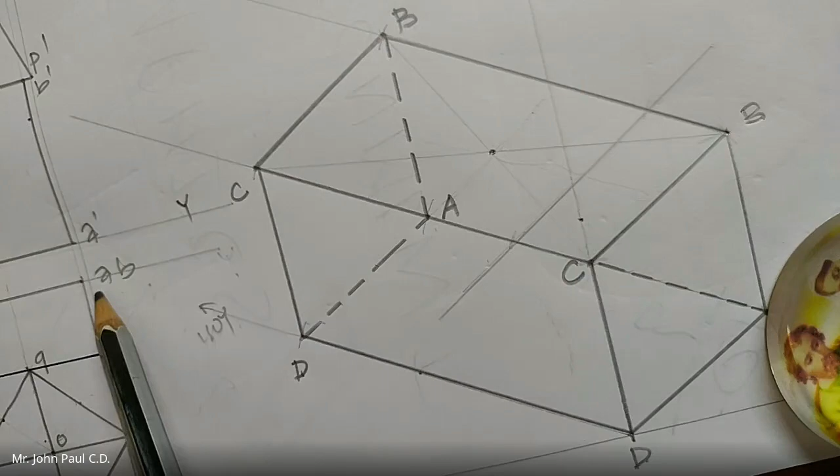അതുപോലെ തന്നെ ഇവിടെ നിന്ന് ഇങ്ങോട്ടുള്ള ഡിസ്റ്റൻസും സെയിം ആയിരിക്കും. ശരിയല്ലേ? ഇപ്പുറത്തെ CBയിൽ നിന്ന് ഇവിടെയും CB ഉണ്ട്, അവിടെ നിന്നുള്ള ഡിസ്റ്റൻസും സെയിം ആയിരിക്കും. I can mark the same dimension from here. So I'll draw a construction line through that also, which is parallel to CB. Right. ശരിയായോ? Yes, sir.

ഇനി എന്താണ് അറിയേണ്ടത്? അതായത് ഈ ലൈനിന്റെ ലെങ്ത്, എനിക്ക് അറിയാമെന്നുണ്ടെങ്കിൽ 1 to 2 ലെങ്ത്തും 3 to 4 ലെങ്ത് സെയിം ആണ്. ഈ ലെങ്ത് എനിക്ക് അറിയാമെന്നുണ്ടെങ്കിൽ എനിക്ക് ഈ പറയുന്ന റോംബസ് കംപ്ലീറ്റ് ചെയ്യാം. ശരിയല്ലേ? Yes, sir. യെസ്. അപ്പോൾ ആ ഡയമെൻഷൻ ഞാൻ എടുത്തു. അതിന് മുമ്പ് എനിക്ക് ചെയ്യാവുന്നൊരു കാര്യം, ഇതിന്റെ സെന്ററിലൂടെ ഒരു ലൈൻ വരച്ചു.

സെന്ററിലൂടെ ഒരു ലൈൻ വരച്ചു. ഇനി ഇവിടെ നിന്ന് ഇങ്ങോട്ടും ഇവിടെ നിന്ന് ഇങ്ങോട്ടുള്ള ഡിസ്റ്റൻസ് ഞാൻ മാർക്ക് ചെയ്ത് കഴിഞ്ഞാൽ I can complete that rhombus. സോ ആ ഡയമെൻഷൻ ഞാൻ ഇവിടെ നിന്ന് എടുത്തു. ഈ ഡയമെൻഷൻ ഇവിടെ നിന്ന്, അതായത് half of the dimension of the line 1-2, ഹാഫ് ഡയമെൻഷൻ എടുത്തു. എന്നിട്ട് ഇവിടെ നിന്ന് ഹാഫ് ഡയമെൻഷൻ ഞാൻ വലത്തോട്ടും ആൻഡ് ഇടത്തോട്ട് മാർക്ക് ചെയ്തു.

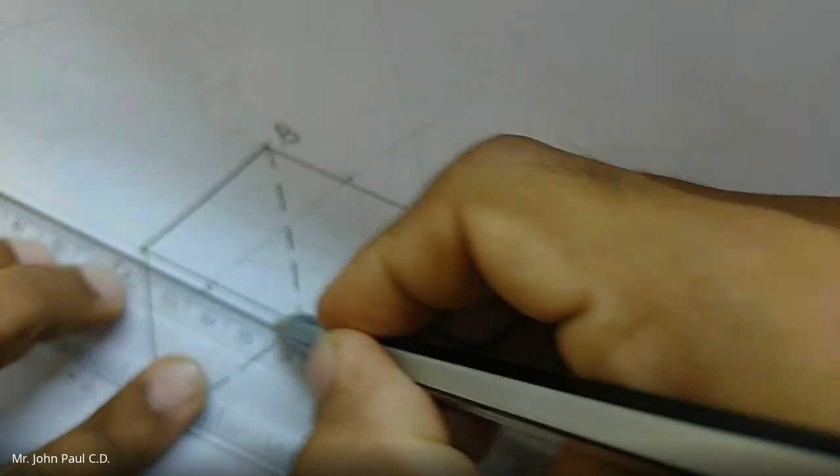So this is almost like here. I got it. Now I'll complete this one. ഓക്കെ, നിങ്ങൾ ആലോചിക്കുന്നുണ്ടാവും സാർ ഇത്രയും വളഞ്ഞ് മൂക്ക് പിടിക്കണോ, അതിനൊക്കെ എളുപ്പത്തിൽ ചെയ്യാമോ എന്ന്. ചെയ്യാം. ഞാനതൊരു ജനറൽ ആയിട്ടുള്ളൊരു കേസ് പറഞ്ഞു മാത്രം, വൺ സോളിഡ് ഓവർ ദി അദർ. എളുപ്പമുള്ള വഴി ഇത് കഴിഞ്ഞിട്ട് പറഞ്ഞുതരാം. So I constructed the rhombus here.

ഇനി ഈ റോംബസിനകത്താണ് എൻ്റെ PQRS ഇരിക്കുന്നത്. PQRS. How can I mark the PQRS? ഈ പറയുന്ന സ്ക്വയറിന്റെ ആക്ച്വലി മിഡ് പോയിന്റ്സുകളല്ലേ PQRS, isn't it? ഇതിന്റെ ആക്ച്വലി മിഡ് പോയിന്റ്സ് അല്ലേ? ഒന്നുകിൽ അങ്ങനെ എടുക്കാം, അല്ലെങ്കിൽ നമുക്ക് ഈ ഡയമെൻഷൻ നേരെ എടുക്കാം. ഐസോമെട്രിക് വ്യൂ ആണ്. 2-2R ഡയമെൻഷൻ നമ്മൾ മെഷർ ചെയ്തു. 2-2R ഓൾറെഡി ഞാനിവിടെ ഹാഫ് ഡയമെൻഷൻ എടുത്തിട്ടുണ്ട്, അതുകൊണ്ടാണ് ഞാൻ പറഞ്ഞത് ഹാഫ് അല്ല മിഡ് പോയിന്റ് അല്ലേ.

2-2R മാർക്ക് ചെയ്തു. ഇവിടെയാണ് R, അതുപോലെ ഇവിടെയാണ് P, ദെൻ ഇവിടെയാണ് ഓൾറെഡി മിഡ് പോയിന്റ് മാർക്ക് ചെയ്തിട്ടുണ്ട്, ഇവിടെയാണ് S. So if I mark it, this is Q, this point is R, this point is P, and this point is S.

You can compare it with the top view. I constructed 1, 2, 3, 4, which is a rhombus, and PQRS is actually the midpoints. I marked PQRS. Now I can mark O, which is at a height of 60 mm. For that I will draw a line which is parallel to ISO-Z, in which I will mark the height of the pyramid, which is given as 60. In my case, you might have taken it as 50, so you can go with 50. So this point is O.

Now I'll join this to the points of the pyramid. Say R, say S, say P, and Q.

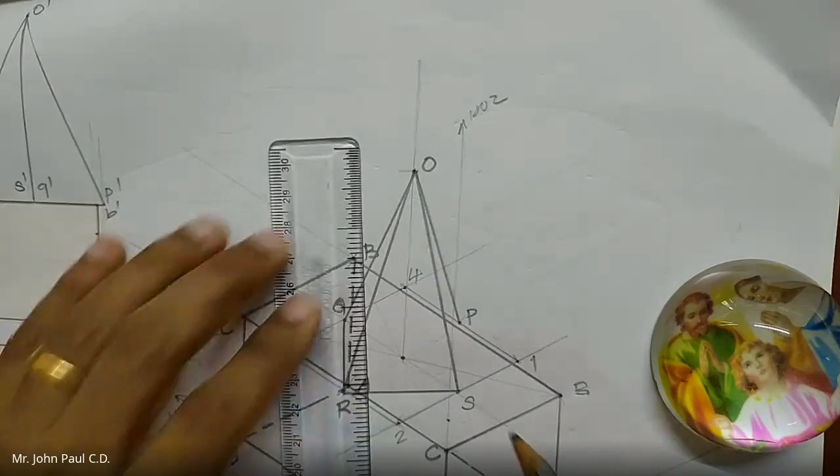This is how you are going to get the solid. പക്ഷേ ഈ വരച്ചിരിക്കുന്നതിൽ ഒരു ചെറിയ പ്രശ്നമുള്ളത്, ഇങ്ങനെ ഒരു സോളിഡ് ഇതിന് മുകളിൽ ഇരുന്ന് കഴിയുമ്പോൾ നേരത്തെ വിസിബിൾ ആയിരുന്ന ടോപ്പ് സർഫസിലെ സ്ക്വയർ പ്രിസത്തിന്റെ കുറച്ച് എഡ്ജുകൾ ഇൻവിസിബിൾ ആവും. Like these edges will become invisible because it is behind that pyramid. This is how you will be getting the answer.

ഇനി പറയൂ ഏത് ഭാഗം ഞാൻ റിപ്പീറ്റ് ചെയ്യണ്ടേ? എനിക്കറിയാം, മുഴുവൻ കത്തിയിട്ടില്ല. യെസ്, വിച്ച് പാർട്ട്? കേട്ടില്ല. I can't hear. Who said?

രോഹനാണോ? സാർ ക്ലാസ് കഴിഞ്ഞ് 11 മണിക്ക് കഴിയണ്ടായിരുന്നു സാർ. നിങ്ങൾക്ക് ഇന്ന് ഓപ്പൺ ഹൗസ് ഇല്ലല്ലോ. ക്ലാസ് ടീച്ചർ അങ്ങനെ പറഞ്ഞത്. ഇന്നലത്തെ അതേ ടൈമിംഗ്. കെമിസ്ട്രി സാറ് ക്ലാസ്സിൽ കയറി ഇരിക്കുന്നുണ്ട്. ഓക്കെ, ശരി, സോറി, താങ്ക് യു. സ്റ്റോപ്പ് ഹിയർ. ഞാൻ വിചാരിച്ചു ഇന്ന് വ്യത്യാസമില്ല.